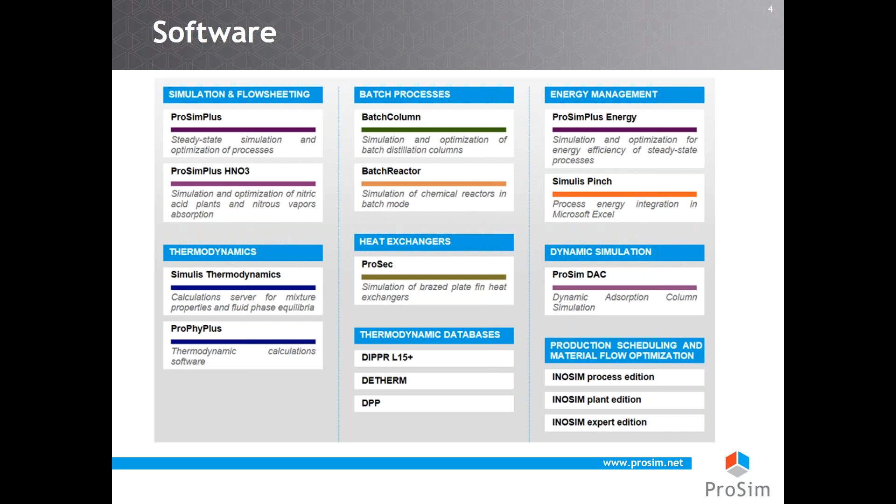Our headquarters is based in the south of France in Toulouse. We also have a subsidiary in Philadelphia in the US. We have a network of distributors located in various countries, and we have over 1,000 customers in 73 countries who are operating companies as well as engineering and construction companies or equipment manufacturers in all process industries worldwide.

Thanks to long-term partnerships with major research centers, ProSim continuously develops innovative software and has become a major player on the international market. I will let Olivier complete the information about our network of partners. So hi everybody. ProSim is a spin-off of the ENSIACET Chemical Engineering School, and so we are very close to the research lab of this school, which is the Laboratoire de Génie Chimique of Toulouse.

We also have collaboration with the other main research center around chemical engineering in Nancy, LRGP, and we work with the team of Professor Jaubert, who developed a thermodynamic model which is predictive, an equation of state based on PR, which is called PPR78.

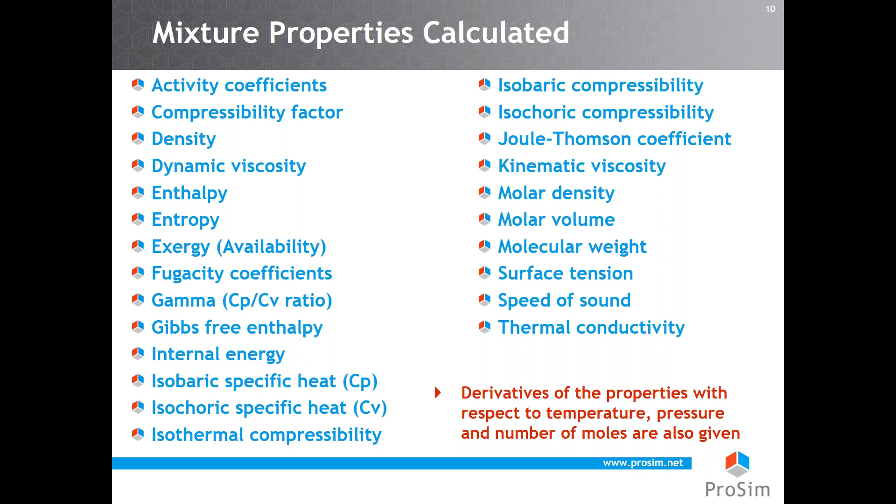And what is very important to note is that you can compute the property, but also their derivatives with respect to temperature, pressure, and also the number of moles. That means that Simulis Thermodynamics can be used to build your model and then compute the Jacobian matrices.

Then also included inside Simulis Thermodynamics are the flashes, which are used to determine the phase of the mixtures, considering temperature, pressure, and composition. You have vapor-liquid equilibrium calculation. To compute a flash, you have to know the composition of the mixtures, but also two different variables between temperature, pressure, vapor ratio, molar volume, enthalpy, entropy, or internal energy.

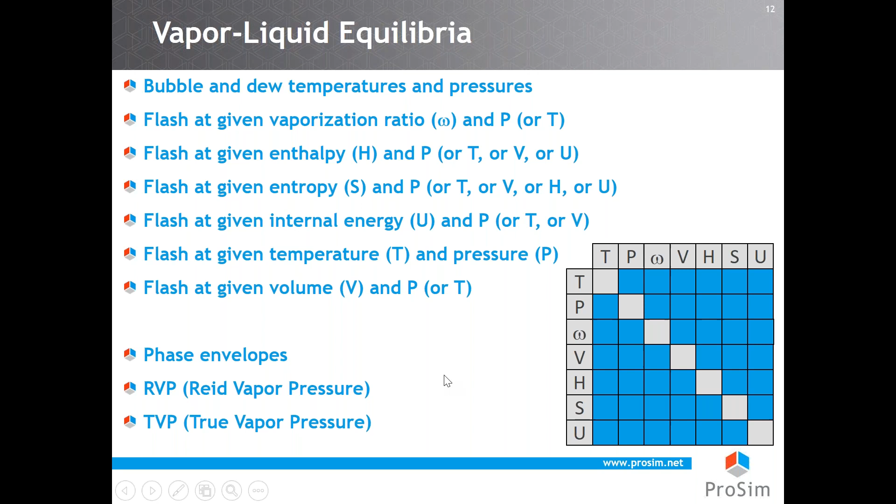And so what you can see on this slide, the matrices, you can compute any kind of flash mixing two of these properties. Using Simulis Thermodynamics, you can also compute phase envelopes and also properties like Reid vapor pressure and true vapor pressure. You can also compute liquid phase demixing, and also you can have flashes with a vapor phase and two liquid phases. And also you can have calculation with a vapor phase, a liquid phase, and a solid phase.

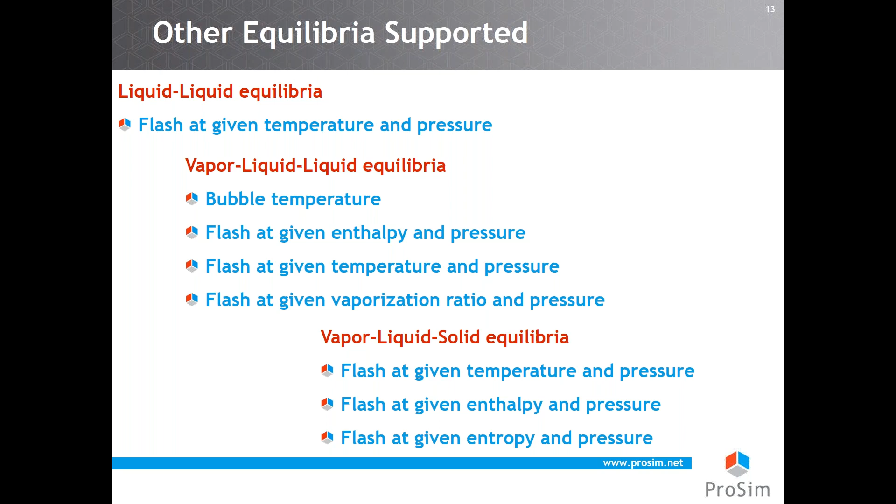Then included also inside Simulis Thermodynamics, you have databases for pure components. Simulis Thermodynamics includes the DIPPR database, and you can include as many user databases as you want. There are also databases for binary interaction parameters for models which require this kind of information. And Simulis Thermodynamics can be linked with the data preparation package, which is a software provided by the DECHEMA.

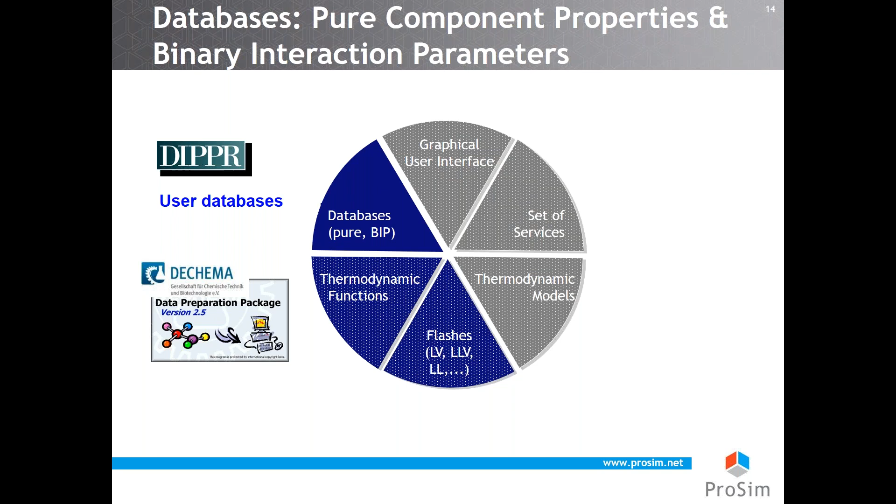Regarding databases, we supply the most recent public release of DIPPR, but also the previous releases that can be used in order to make comparison with components from the previous release. And also you can be sure that you can get the same results with calculations you have done some years ago. For pure component properties, you can of course access all the properties which are included for all components. You can modify them if you want. You can also plot the temperature dependent properties.

Included inside the software, you have a tool to regress your own experimental data or experimental data from the literature. We also provide methods for the prediction of intrinsic but also temperature dependent properties from the molecular description of the molecules using the SMILES, which is a very common way to describe the molecular structure of the molecule. The SMILES can also be used in order to generate all the group contribution predictive model decompositions, such as, for example, PPR78 or UNIFAC methods. And Simulis Thermodynamics includes also tools to calculate petroleum fraction properties.

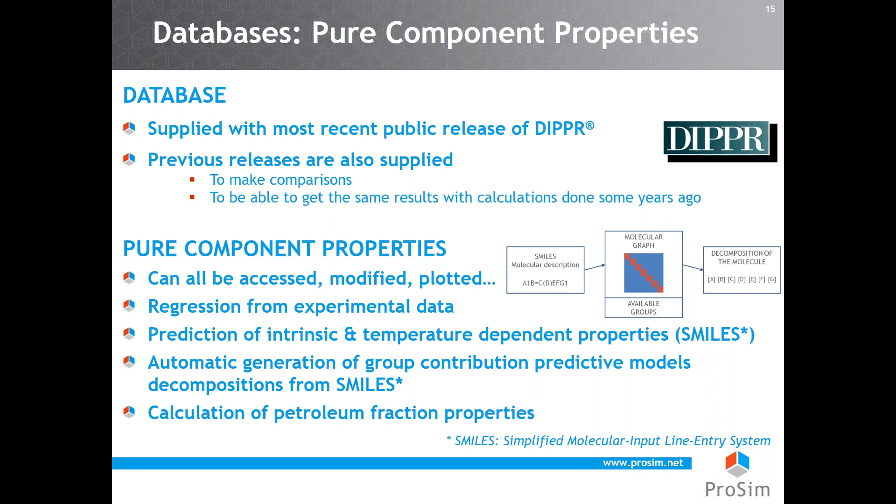Regarding the binary interaction parameters, for models which require this kind of information, like for example, activity coefficient models like NRTL, or equations of state like Peng-Robinson or Redlich-Kwong-Soave, we provide libraries for this information. But you can also fit this information from experimental data using the data preparation package from the DECHEMA or using Simulis Thermodynamics inside Excel.

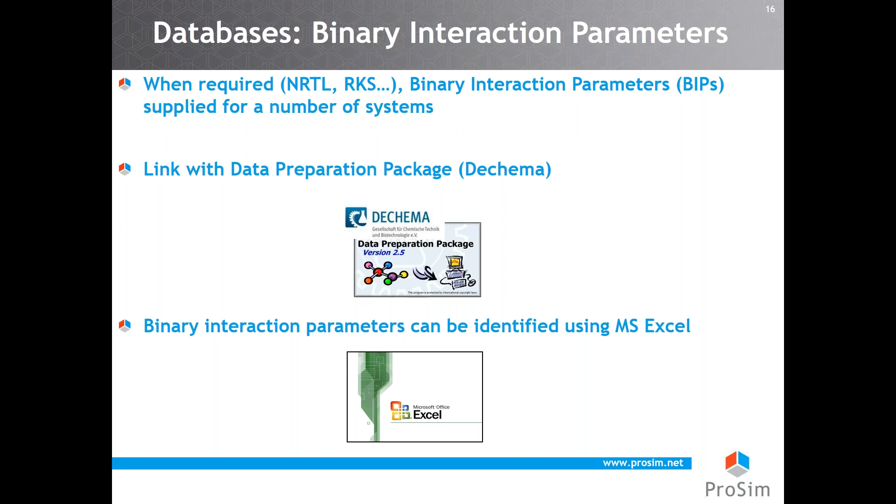Of course, the most important part of a thermodynamic server is the library of thermodynamic models. Roughly, there are two different approaches to describe thermodynamic phase equilibria and thermodynamic properties. One is called the homogeneous approach. That means that you will use just one equation to represent all the phases which are present in the mixture.

This equation of state presents several advantages. You need few data. That means, for example, for cubic equations of state, you will need only critical temperature and pressure, acentric factors, and binary interaction parameters. And if you want to do some enthalpy calculation, you need also the ideal gas heat capacity. And there is no limitation in terms of temperature and pressure.

But there are some drawbacks also using this kind of approach. The main drawback is that when we use van der Waals mixing rules, this kind of equation of state is very often limited to low polar components. So the other way to represent your thermodynamic system is the heterogeneous approach. That means that you still use an equation of state to represent the vapor phase, but in order to take into account the non-ideality of the liquid phase, you will use an activity coefficient model.

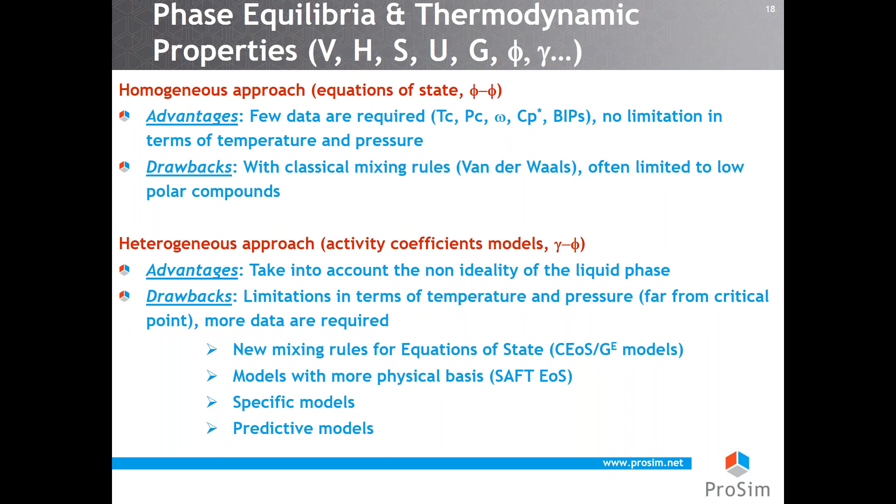So that means that we try to develop and implement every year new models, and these developments are linked with several ways, which are: first, we try to have new mixing rules for equation of state. We will have some explanation after that. We also try to have models with more physical basis, like SAFT equation of state. We also implement some specific models for specific systems. And given that there are a huge number of molecules in nature, we also try to implement more and more predictive models.

If we have a short explanation about the equation of state approach, here you have a phase diagram for two-component mixtures with methane and benzene. The pink curve represents the vapor pressure of the methane. The round circle here is the critical point, and the yellow curve is the vapor pressure of the benzene with its critical point here. Above the curve, you are liquid, and if you are under the curve, you are vapor.

From the knowledge of the pure component properties, if you want to know in the pressure-temperature plane what phases are present for your system, you need to use an equation of state to compute what we call the phase envelope. That means in blue the bubble curve, and in red the dew curve, and both curves are crossing at the critical point of the mixture. Above the blue curve, you are in the liquid phase. Under the red curve, you are in the vapor phase. And inside these curves, you have both liquid and vapor.

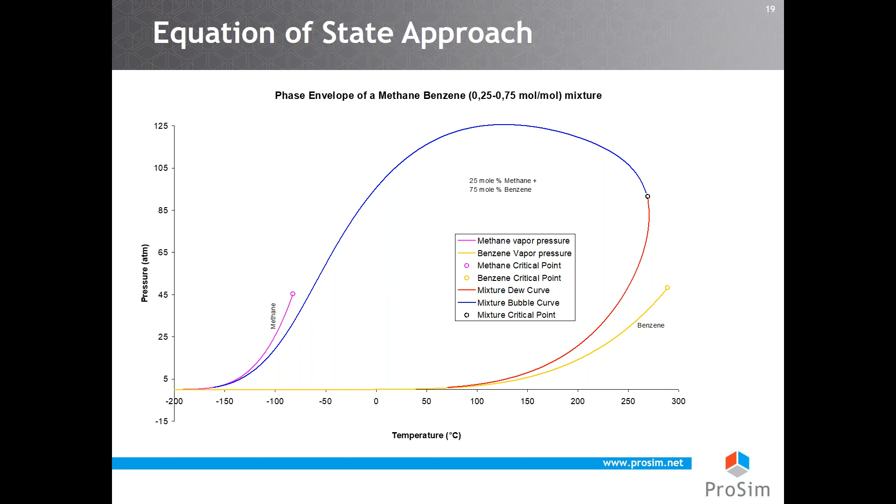This kind of phase envelope is very useful, for example, when you do some gas transportation. In this slide, you can see mixtures with mainly methane. That means 99.99 mole% of methane, with just a small amount of impurities, which are nonane, ethylbenzene, and dimethylcyclohexane, only 0.01 mole%. And you can see that the shapes of the dew curves are very different.

If we are at 40 bars, for example, if the impurity is n-nonane, that means that if the temperature is less than -8 degrees, there is a liquid phase which can appear. If the impurity is ethylbenzene, in that case, the dew curve is around -20 degrees. And if dimethylcyclohexane is the impurity, in that case, you can go to -40 degrees with no liquid phase.

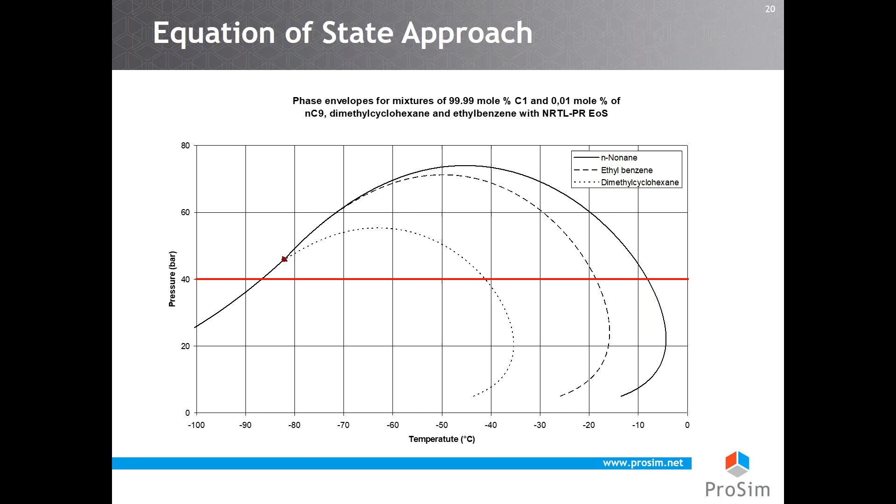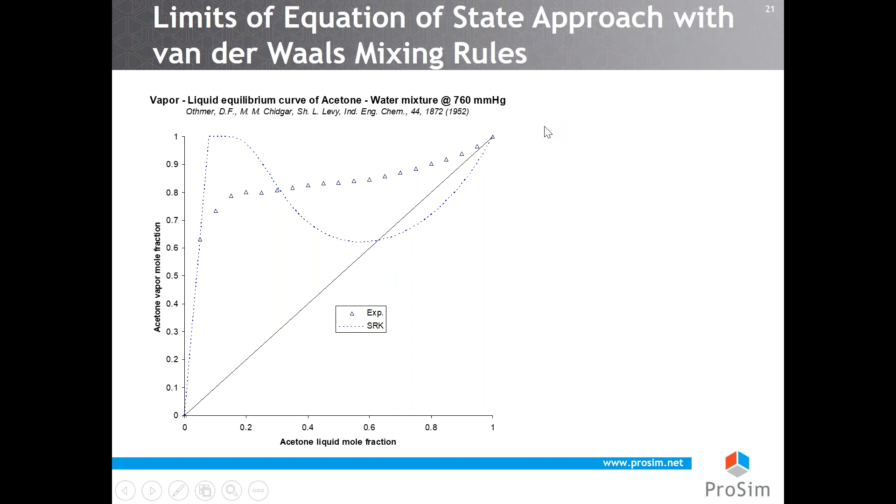The problem is that when we use an equation of state, like for example SRK, to try to represent mixtures with polar components, like the acetone-water mixture, you can see on that graph experimental data, which are the triangles, and we plot the vapor fraction with respect to the liquid mole fraction. And if we use SRK, you can see that the behavior is not the one in the real case.

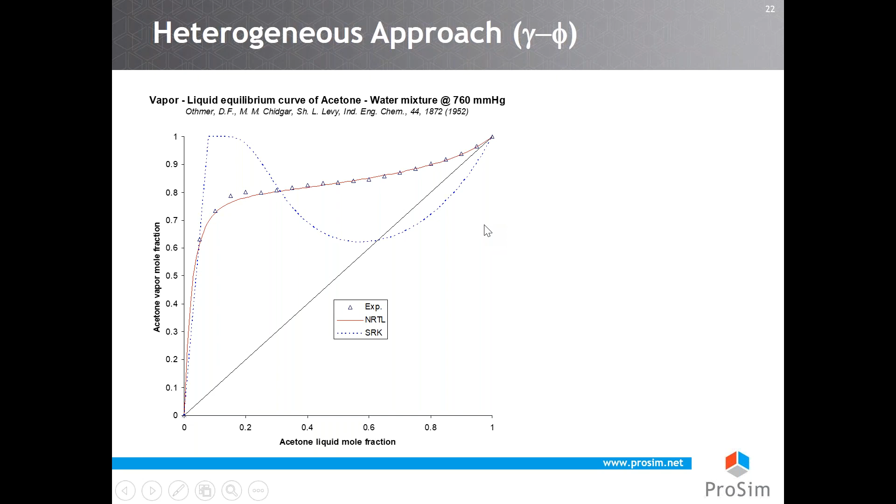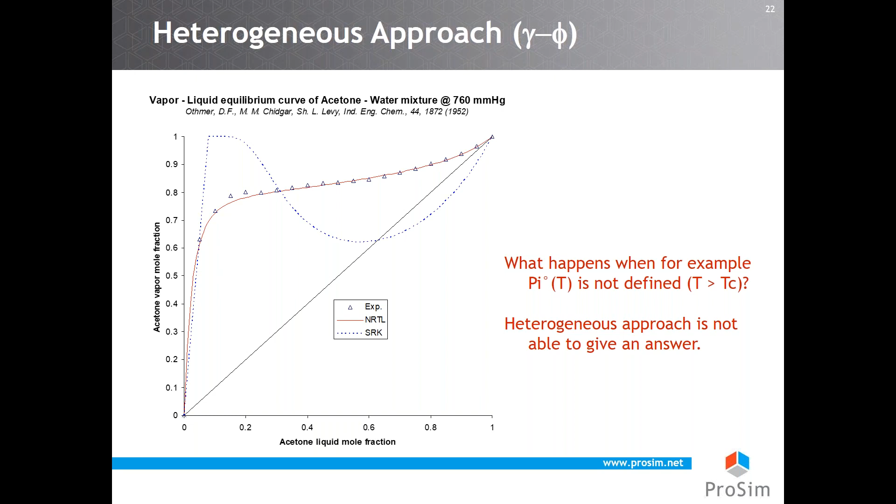So in that case, what we have to do is to use an activity coefficient model to represent the non-ideality in the liquid phase. And in that case, you fit binary interaction parameters and you obtain values which are close to the experimental points. The problem with that approach is what can we do if, for example, the temperature is above the critical temperature of one of the components, because the vapor pressure is not defined. So that means that the heterogeneous approach in that case is not an answer.

So researchers developed in the 90s of the previous century new mixing rules. They started with cubic equations of state based on the Redlich-Kwong or Peng-Robinson equation of state, for example. And they developed mixing rules. The first one was developed by Vidal from the French Petroleum Institute. And there were modifications by Michelsen, by Huron, and so on.

And inside the attractive term, the Gibbs excess model is included, and this model can be one of the previously described models, like Wilson, NRTL, UNIQUAC, or a predictive model like UNIFAC. That means that this is an equation of state approach which is able to manage polar components also.

But what is interesting is the next slide: if you use this model with no more information, you are able to predict the vapor-liquid behavior at elevated temperature and pressure. And if you have a look at the red curve, in that case, you are above the critical temperature of the acetone. So that means that this kind of model is predictive at elevated temperature and pressure.

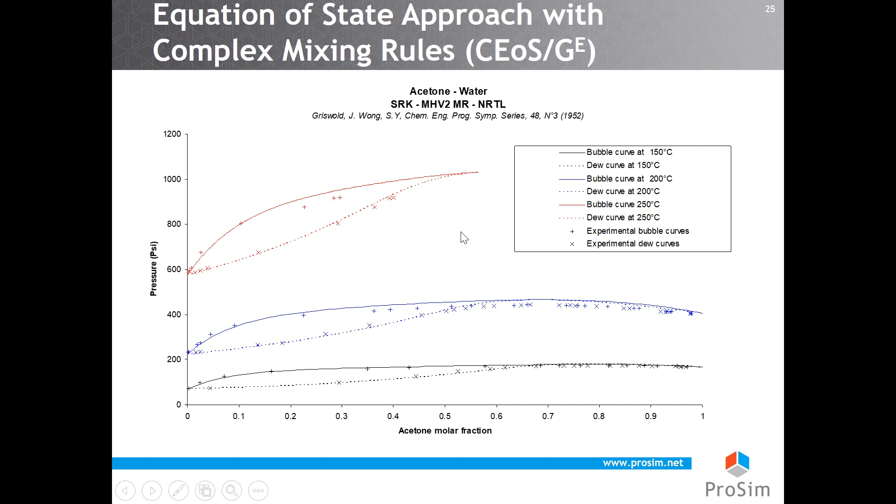Regarding the library of thermodynamic models included inside Simulis Thermodynamics, you will find classical equations of state like Redlich-Kwong-Soave, Peng-Robinson, and so on. You can select several kinds of alpha function. You also have other equations of state based on corresponding states, like LKP, or based on hard sphere models like Nakamura, and also SAFT equations of state, and so on.

Also included, you have a lot of activity coefficient models, including all the models developed by the Unifac consortium, which are predictive models, but also other predictive models, like the Unifac model developed by NIST.

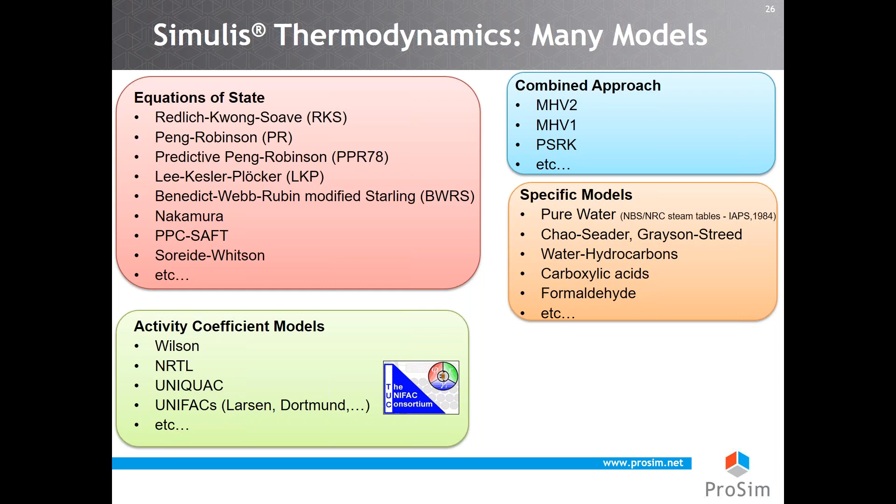Regarding complex mixing rules, as I mentioned before, you have several mixing rules. You can link any cubic equation of state with any Gibbs excess model. We also include specific models, mainly for associating components, like pure water, for example, but also for carboxylic acids for dimerization, or for systems with water and formaldehyde, for example.

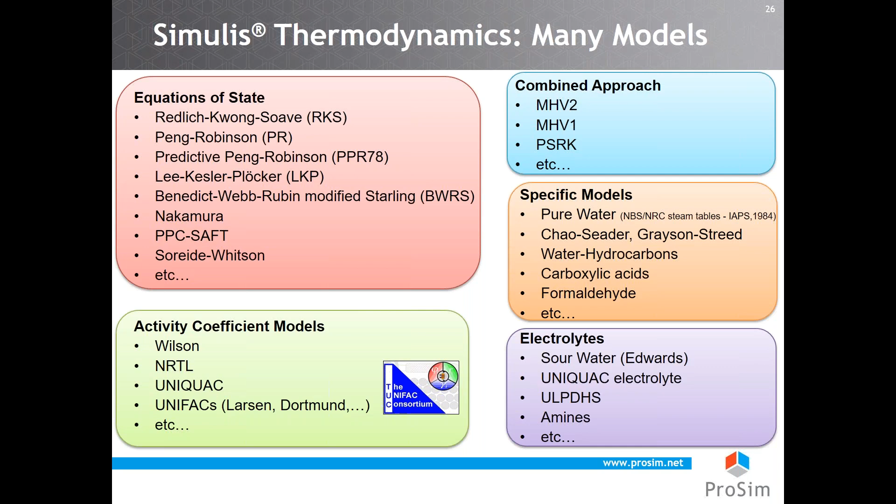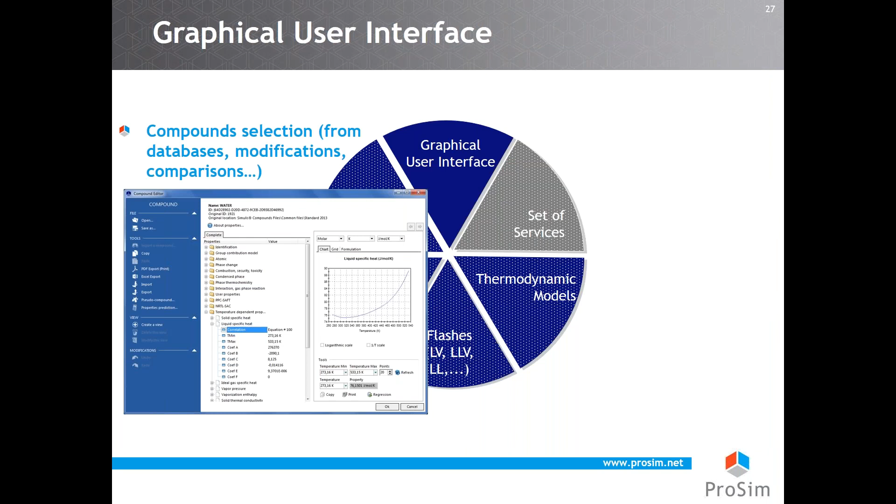And we also have a library of electrolyte models. Also included inside the software component, you will find a graphical user interface. This graphical user interface can be used to select your components from the database. You can modify these properties, compare them, and so on, but also configure your property model. And what is important to note is that there is no black box inside Simulis Thermodynamics. That means that anything you want to change, you can change it.

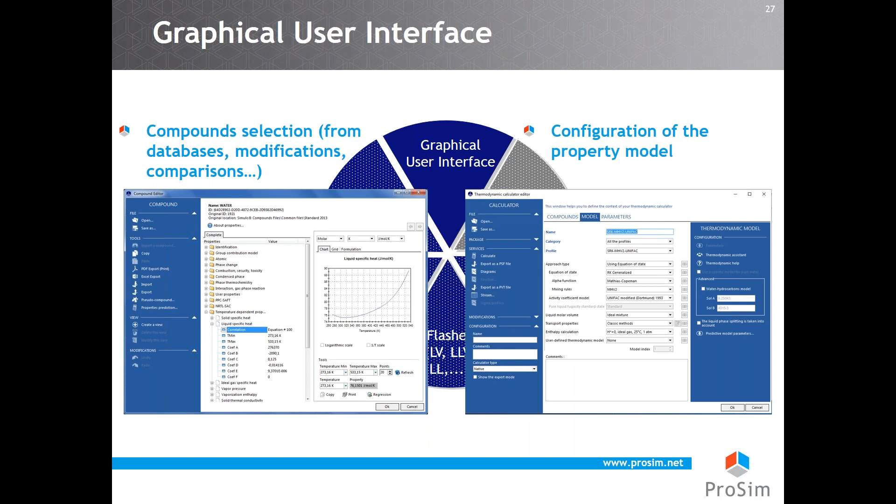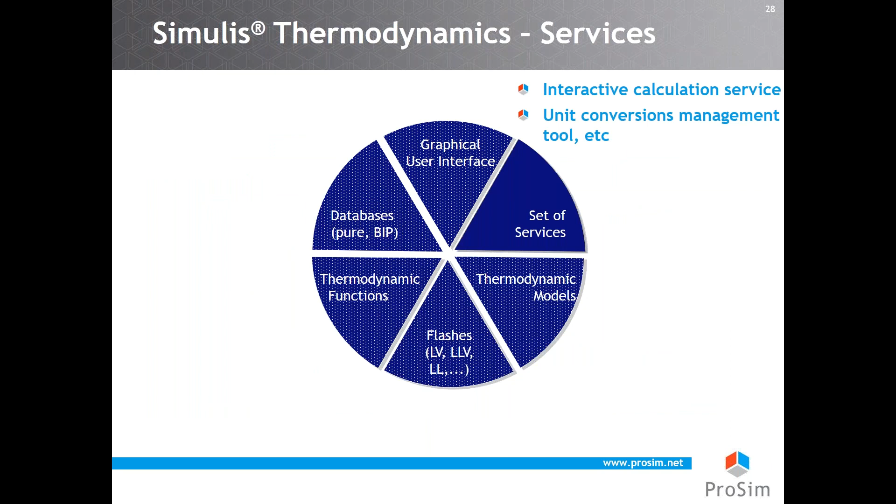The last part is what we call the services, for example to manage unit conversions or to have interactive calculation. For example, directly from Simulis, you will be able to compute fluid phase equilibria, or also residue curves in order to manage your distillation.

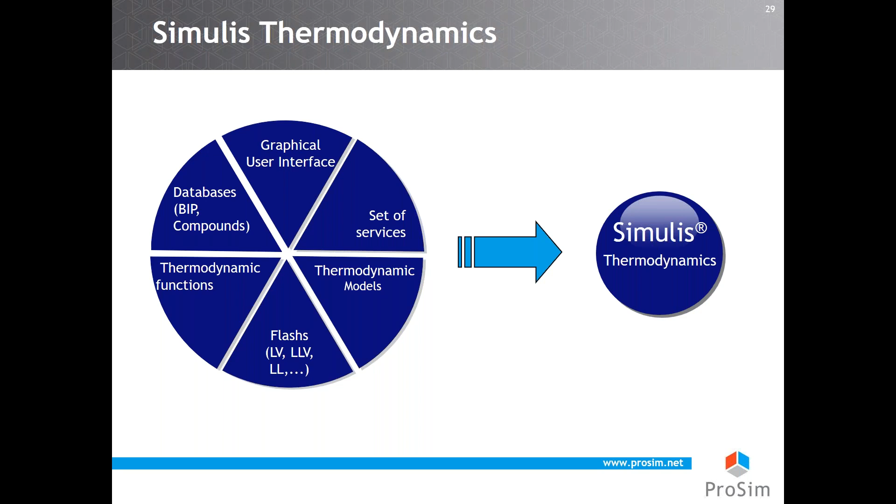And all these things, as I said before, are included inside the components. That means that any software which embeds Simulis Thermodynamics will be able to access any of these functionalities.

Simulis Thermodynamics is used as the heart of all our software. That means ProSim Plus, for example, for steady state calculation, or Batch Column for calculation of batch distillation.

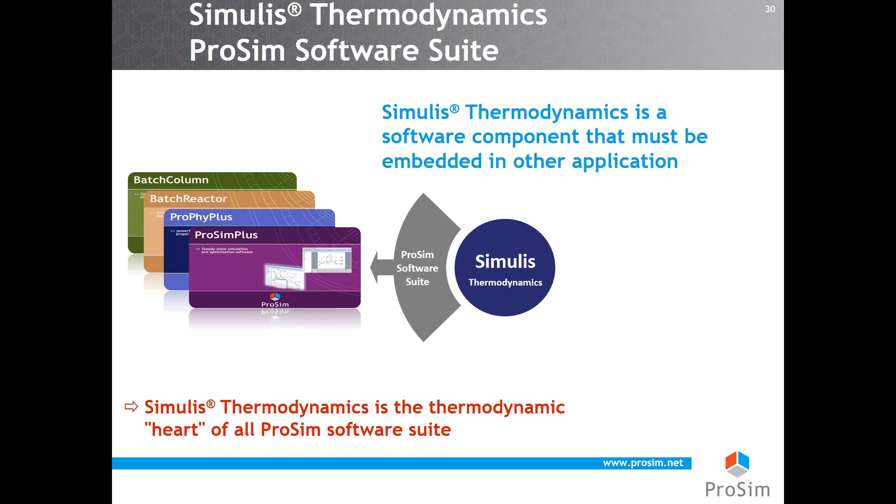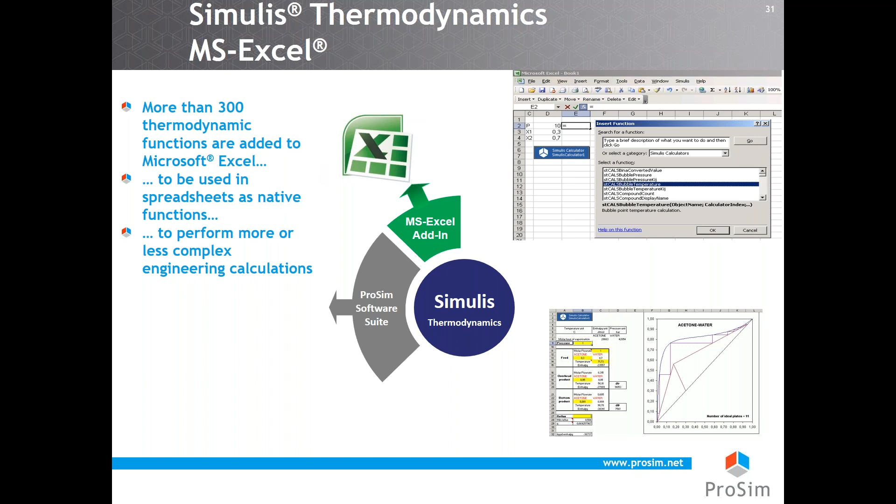Simulis Thermodynamics is also available as an add-in in Microsoft Excel. We will have a look at that in the next part of the presentation. That means that you will find several hundred new functions which are related to thermodynamics. You also have a toolbox in MATLAB, so that means you will access the same thermodynamics in Excel and in MATLAB.

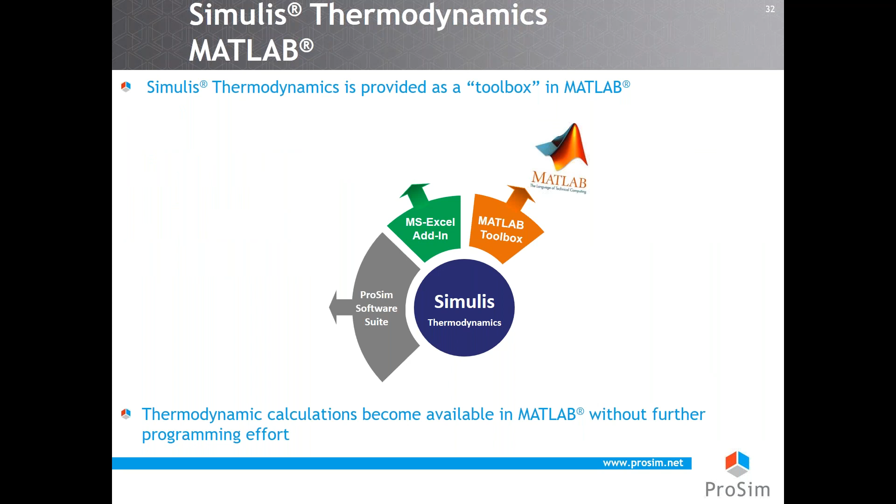You can also export your results to Microsoft Excel, or in some formats which are used by software that requires tabulated data.

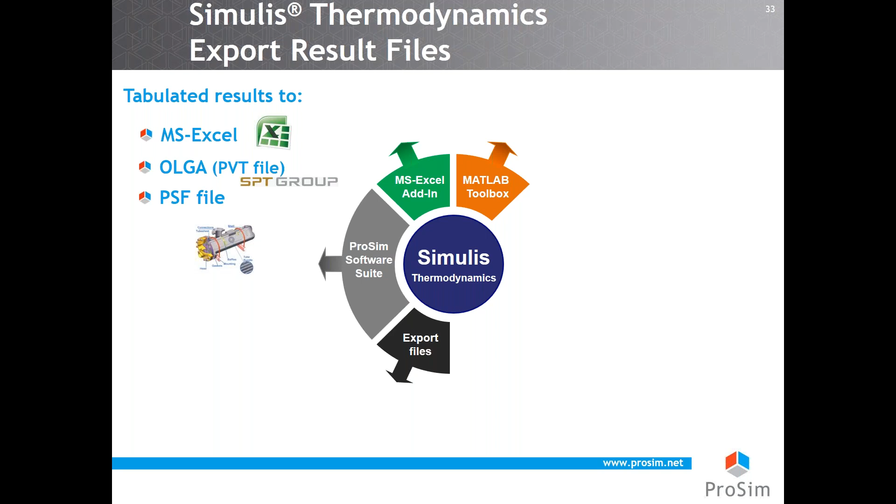We also provide with Simulis Thermodynamics an application programming interface. That means that you can use Simulis Thermodynamics inside any programming language like C++, C#, Fortran, and so on. And so some of our customers use Simulis in their own software as a thermodynamic server.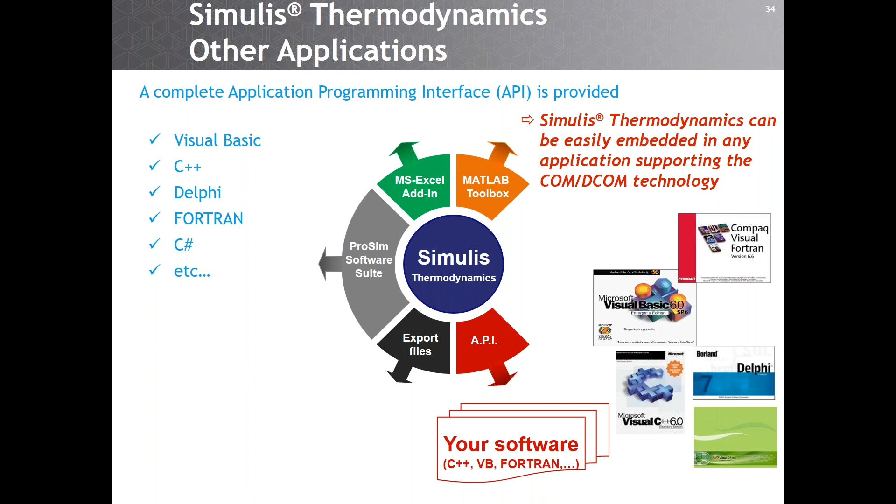We spoke very shortly about Cape Open. Cape Open is a standard which was developed in the middle of the 90s in order to have interoperability between software providers. It was a European project at the beginning, then it became a worldwide project, and today it is used in order to have one software which is able to communicate with another software.

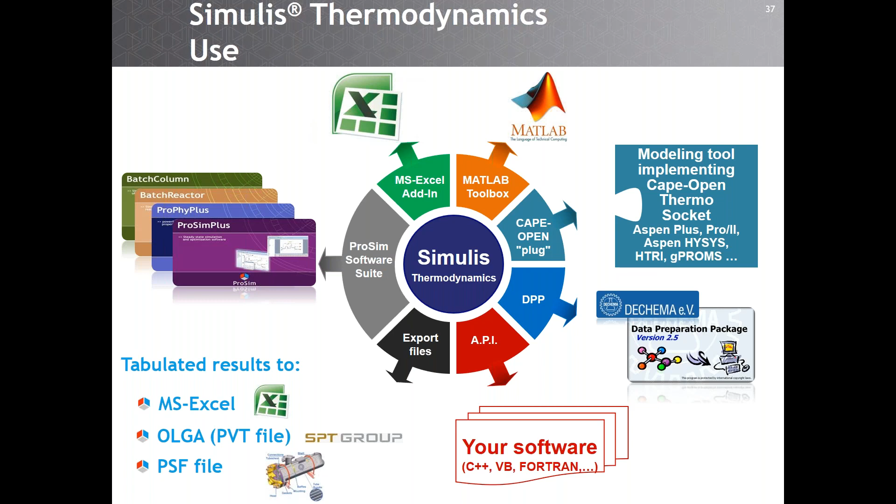So when you see this slide, you can see that using Simulis Thermodynamics, you will be ensured that you will have the same way to describe your thermodynamics. That means that you just have to learn how to use Simulis Thermodynamics, and you will have always the same results, given that you use the same software component.

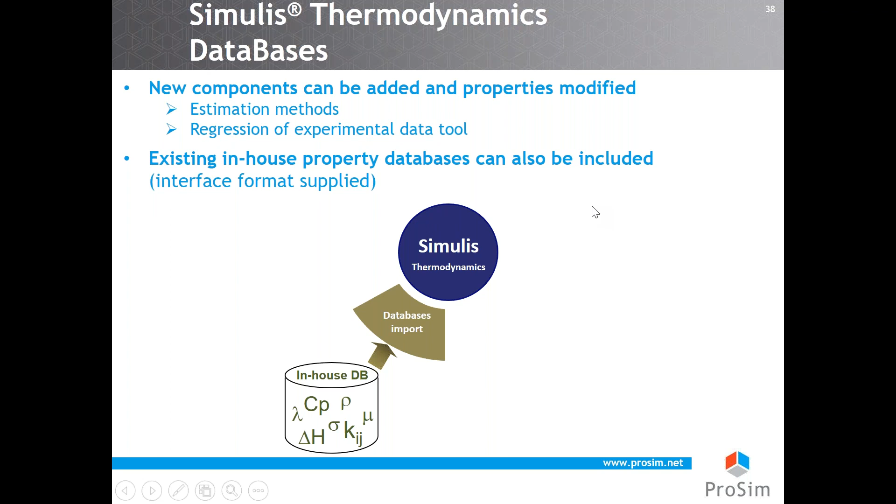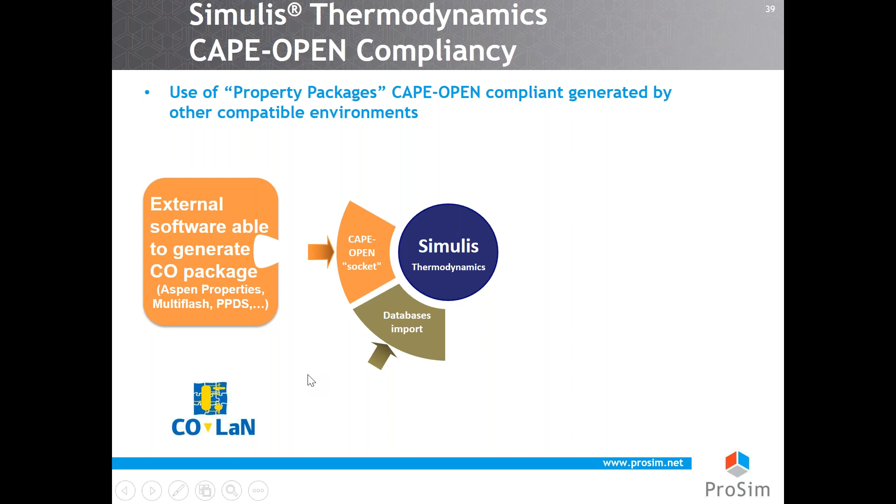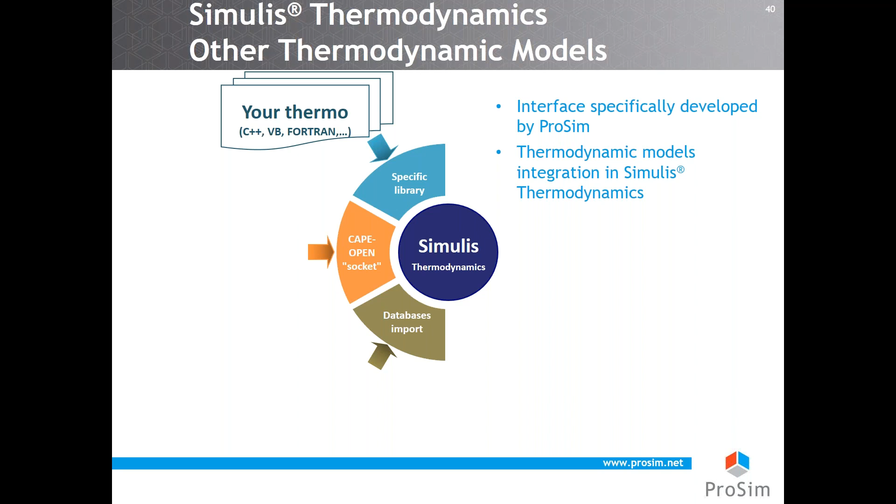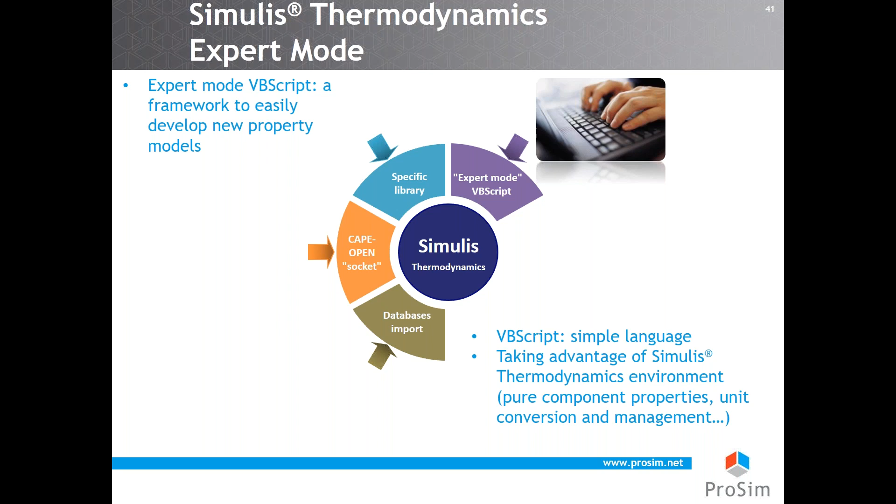You can also implement your own model using a very simple language, VB script. In that case, you can access all the thermodynamic properties - pure component properties, but also unit conversion and so on. This kind of feature can be very useful, for example, if you want to add new mixing rules for viscosity or thermal conductivity. With just a few lines of code, you'll be able to have the exact behavior of your mixture.

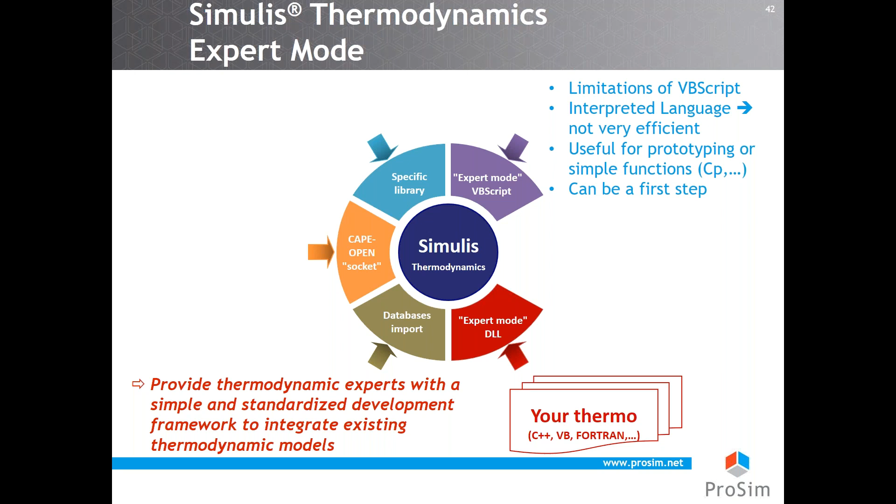The last part is that you also have inside Simulis Thermodynamics a socket which is here to use directly the RefProp library from the NIST. So here you have different ways to enrich Simulis Thermodynamics with your own model or models coming from other providers.

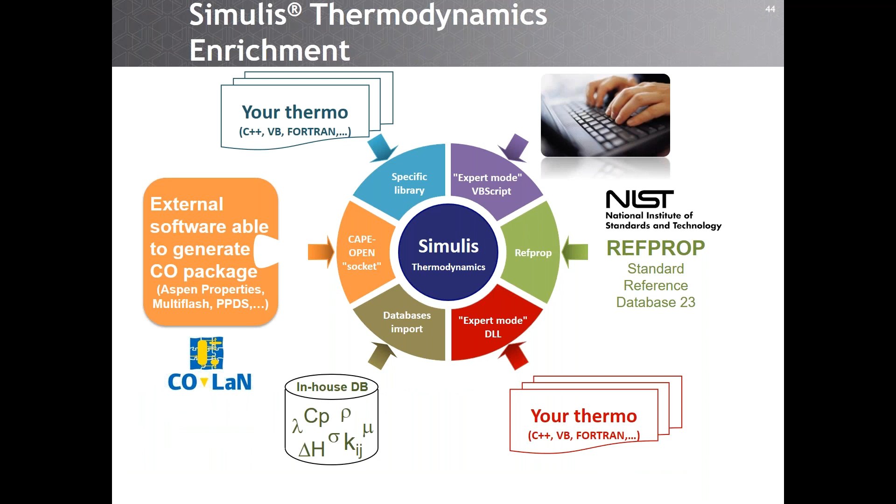So I will now go inside Microsoft Excel. When you have Simulis Thermodynamics, in the add-in tab, you have this menu, and you can insert a Simulis system, for example. In fact, Simulis is like the Russian doll.

At the heart, you have the unit management. Then above that, you have the compounds, Simulis compounds, which is related to the properties of the components. Then you have Simulis compounds, which correspond to the list of components. Then the Simulis calculator, which corresponds to a list of compounds plus the model used to describe these mixtures. And then Simulis calculators, which correspond to a list of calculators.

So we will use today a Simulis calculator. You have to select the place in the Excel spreadsheet where you want to put the Simulis object. You can add as many Simulis Thermodynamics objects as you want in a Microsoft spreadsheet.

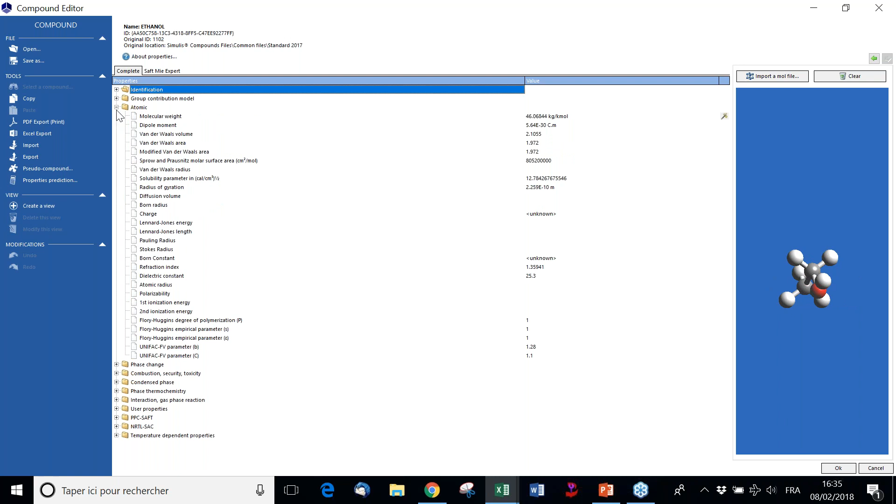You also have atomic properties. You have phase change properties. And what you can note is that thanks to the Simulis Units software component, for example, for the critical pressure, here you have all the corresponding values for different units.

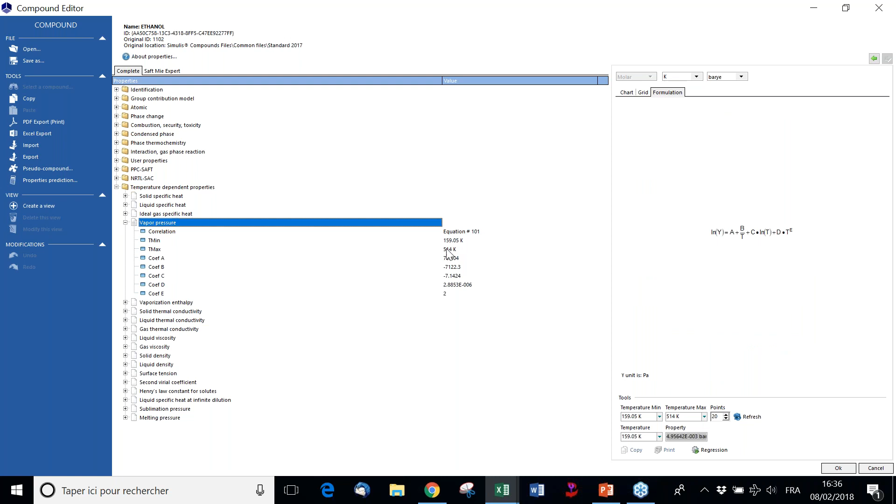Regarding temperature-dependent properties, here, for example, if we look at the vapor pressure, here you have the equation which is used. On the right part of the tab, you can see the formulation of the equation. And here you have the validity range for the correlations and the coefficients A, B, C, D, and E.

Here you have the values which are tabulated from the minimum temperature to the maximum temperature, and here you have the chart. Of course, you can change the unit if you want. You can also change the scale, for example, here. And you can also compute the value at different temperatures if you want.

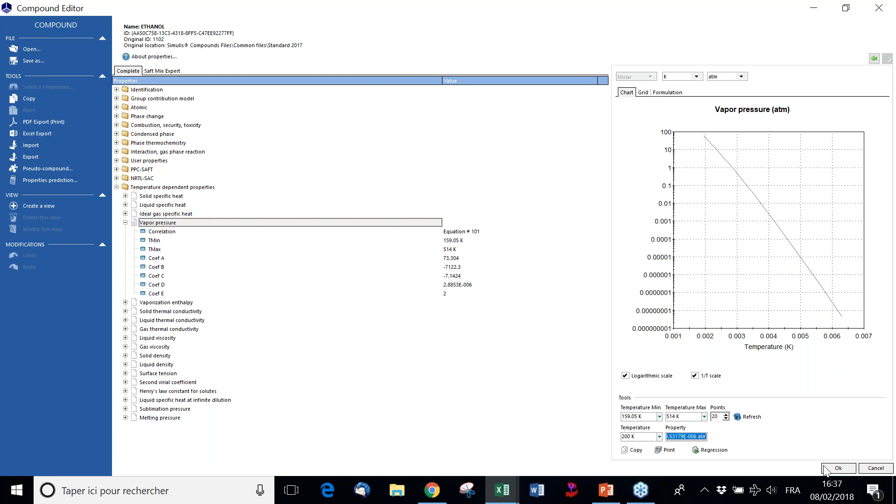Then I spoke before about services. Here, for example, you have services about components. You can do some comparison on the properties - for example, properties depending on temperature. We will select the vapor pressure, and we will compare the properties for all the components, which can be useful if you want to see which are the more volatile components, or for example, if there are some Bancroft points, to see if there could be some azeotrope in the system and so on.

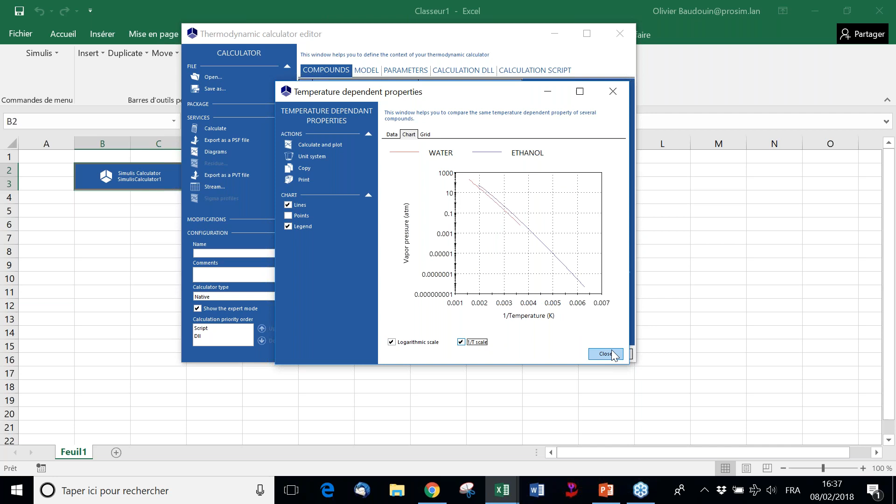You can also compare components if you want. That means, for example, if you clone components and have some properties changed, you can see where the differences are. If you've made a change, you can compare with the original. Simulis Thermodynamics will tell you if there are changes between the database and the calculator. There's also the editor array, useful when you want to compare components and see the values for one versus the other.

Regarding the databases, it's very easy to publish a new database. You have this button, then you enter the name here, click OK, and you have a new database. You can also save the compound package as a compound file, and then open this compound file from any other Simulis object.

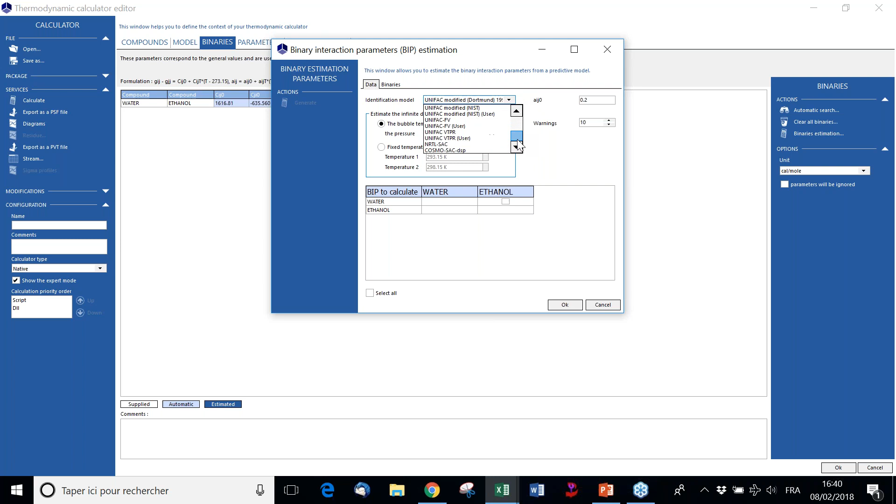Using NRTL, we need some binary interaction parameters, so we have a new tab here for binaries. When you go to this binary tab, you can search directly from our databases - an automatic search that fills in data stored in our database. If you want, you can also estimate these binary interaction parameters using one of the predictive methods we have, like UNIFAC, but also methods like COSMO.

So once you've selected the components, described the model, and set the binaries, you can use the services offered by the calculator, like the calculation service. Here you have several calculations available for physical properties, like transport properties and so on, or for equilibria calculation. What we're doing is computing the bubble and dew temperatures at atmospheric pressure for the entire range of composition from pure water to pure ethanol.

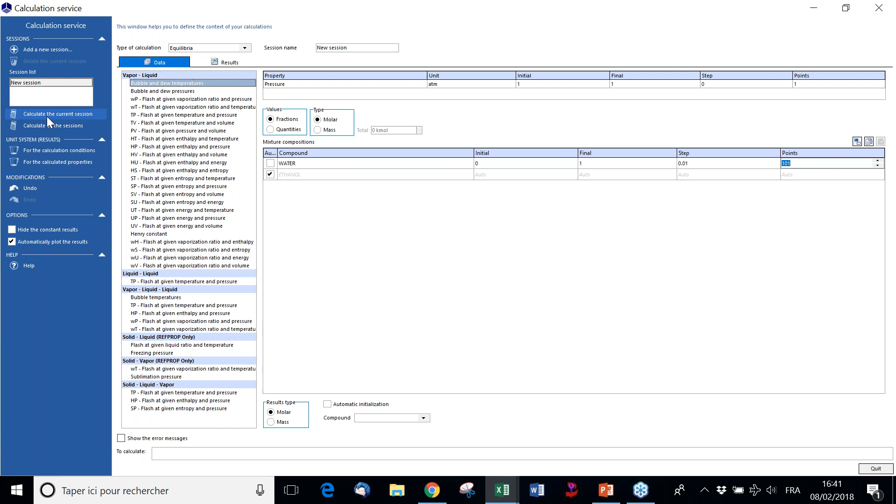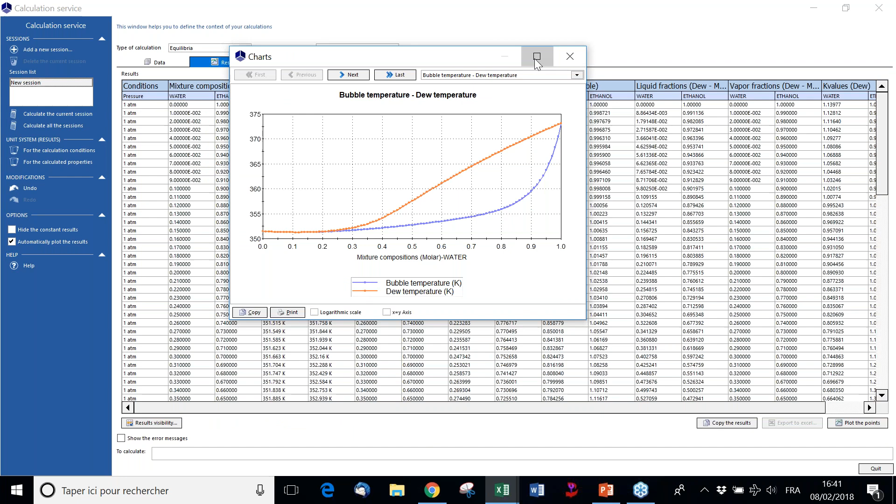And then we calculate. Here we have the results - the bubble curve and the dew curve. You can also have the equilibrium curves here, meaning the vapor fraction with respect to the liquid molar fraction. You can add this axis and zoom in to see where the azeotrope is.

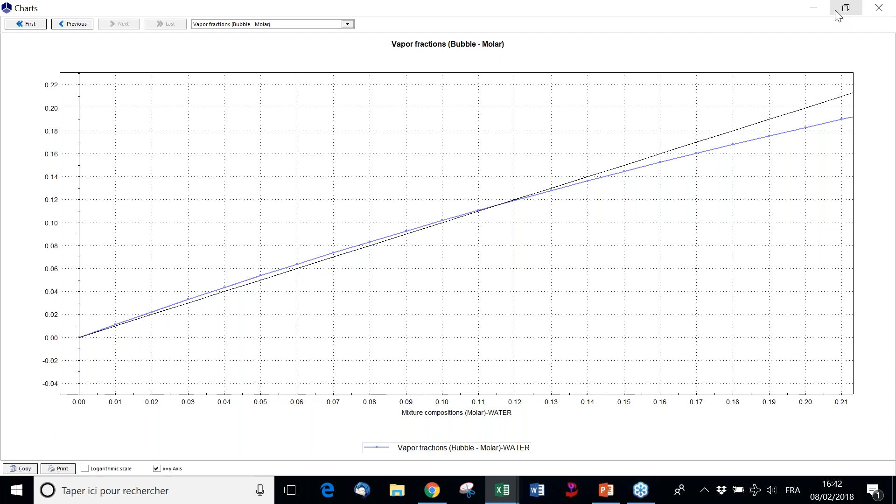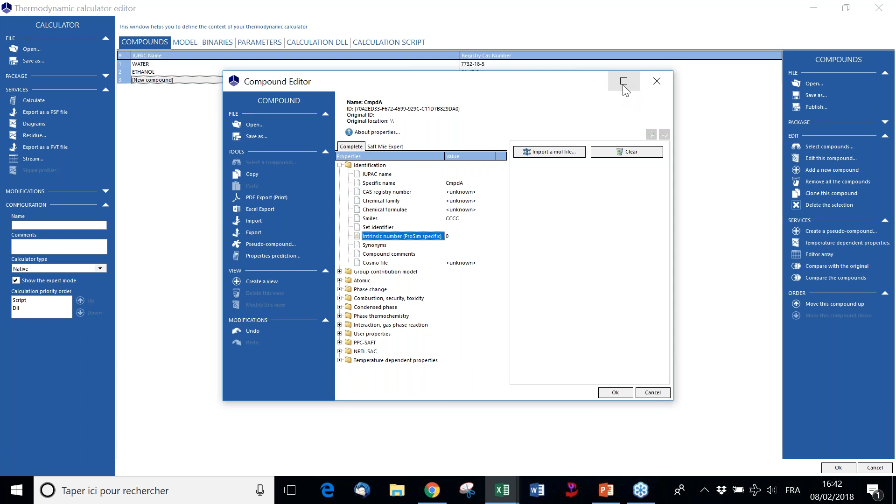If you want to add a new component, you use 'add a new compound' here. When you click on this component, it's empty - nothing is stored - so you can provide a name, for example. Then if you provide a SMILES string here, you'll see a symbol appear, and if you click on that, it will predict the property. You can predict all the properties if you want using this button, and select several types of prediction methods.

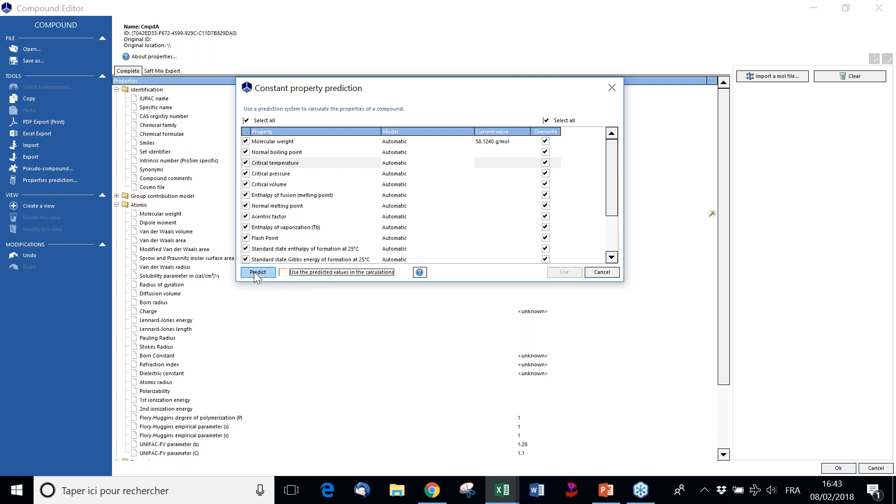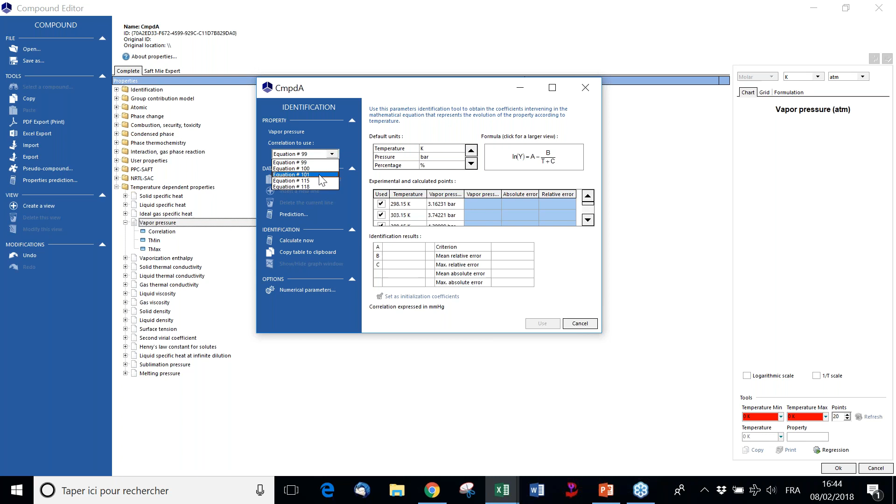And it will fill all the fields here. Regarding temperature-dependent properties, like vapor pressure for example, you can go to the regression button, and then you have two choices: you can copy and paste experimental data, or predict your value using a method. Here you have the predicted properties - select the equation you want to use, for example the DIPPR equation, then calculate and do the regression. Here you have the results in graphical form, and also all the results from the fitting, which will show you all the fitted parameters.

Now I'll show you how you can access these properties inside Microsoft Excel. Since you can have several calculators inside the same spreadsheet, you have to rename your calculator first. In this case, I'll call it water-ethanol-NRTL. I'll put the name here, and then I'll access the properties.

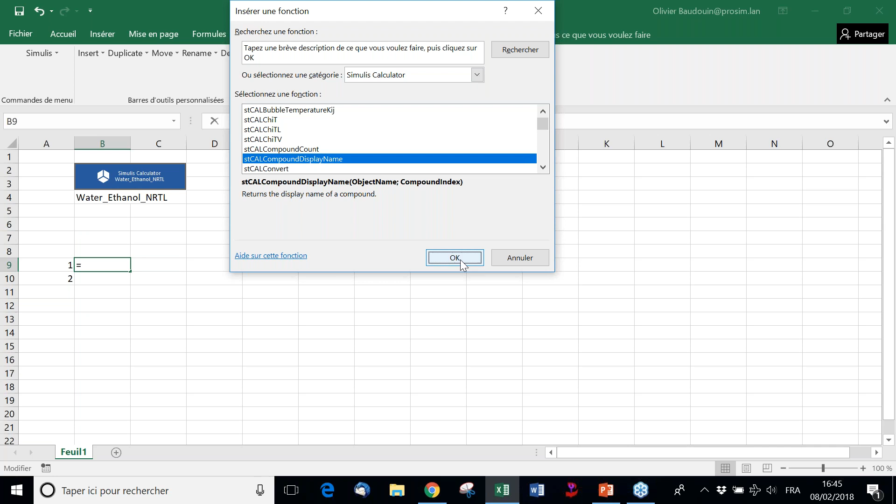If you click on this button, you'll see new categories of functions, for example Simulis calculator, and here you have all the functions available. For example, this function returns the display name of a component. The first argument is the object name, meaning which calculator you want to use - this one - and then the component index, this one. What's also important is to have the correct units used in your calculation spreadsheet.

And here, I will go to select a function which is providing the units which are used inside Simulis Thermodynamics for the input system. That means, if I provide here the one value, this one, and the quantity. The quantity is the English name of the value, and if you want to find this quantity, you have here some help on the identifiers.

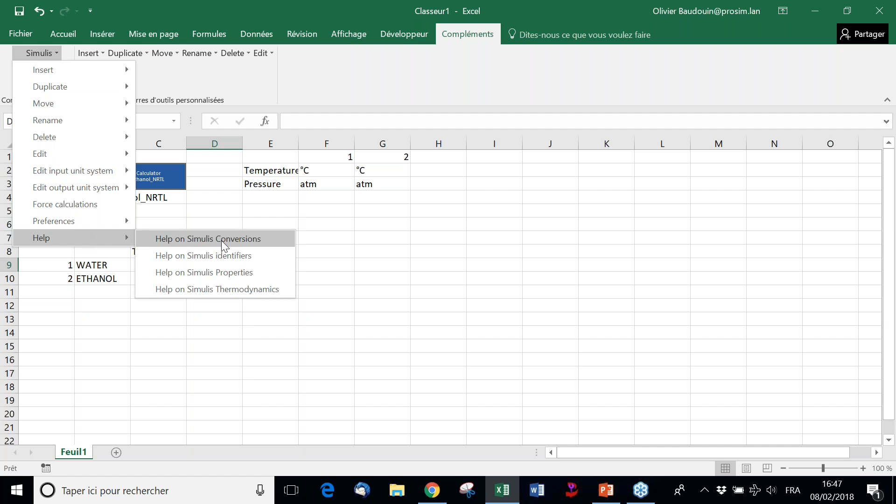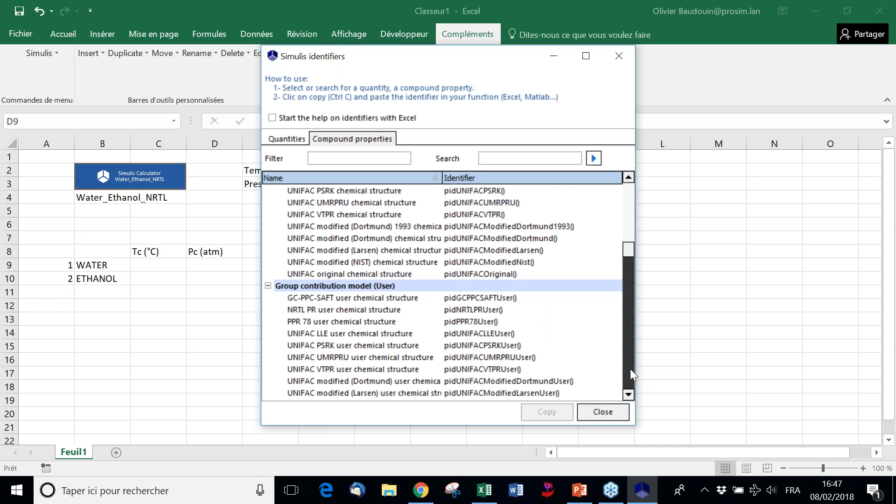You can also have access to all the properties which are stored for the components. For example, we can recover the critical temperature and the critical pressure. And we need, in that case, to know the identifier of these properties. These properties are phase change properties. So here you have the identifier for the critical temperature. I copy. And here for the critical pressure.

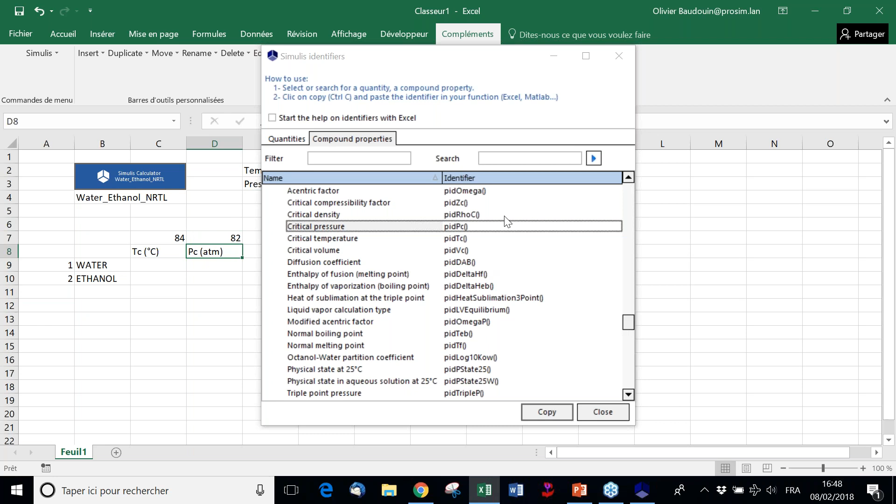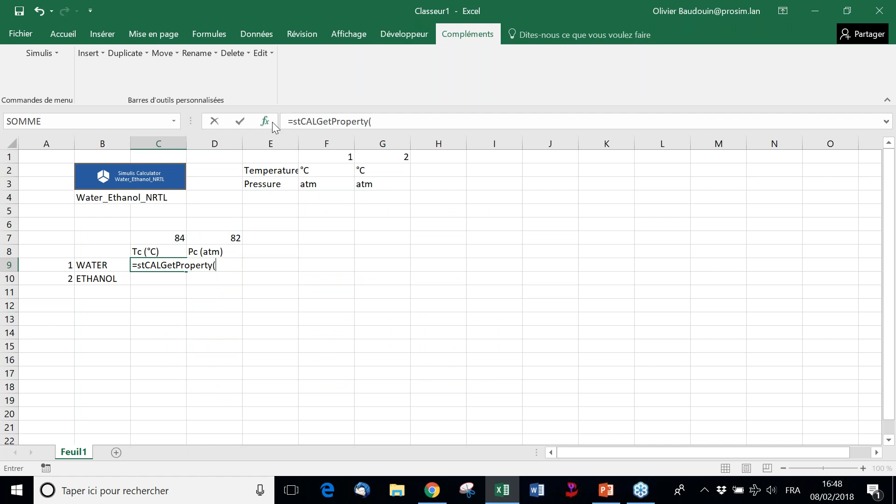And you have a function to have access to the property. Still the object name, then the compound index, then the property ID.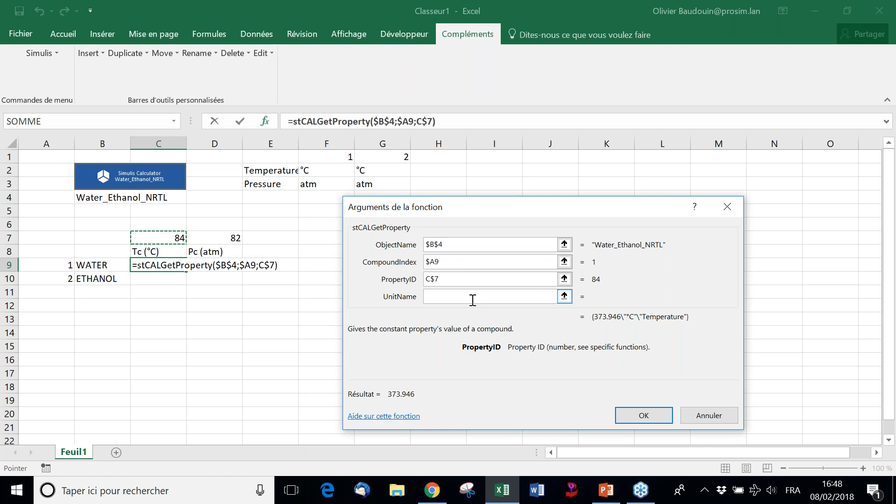Now we'll do the same calculation as the one we did previously in the Calculator service. We'll do the bubble and the dew curve calculation. So first I will put the composition of the mixtures. I will do the calculation from 0 to 1 with a step of 0.01.

Here I will compute the bubble temperature. I will put here the pressure for the calculation, and also whether I want molar or mass for the composition in the input, and molar or mass for the results.

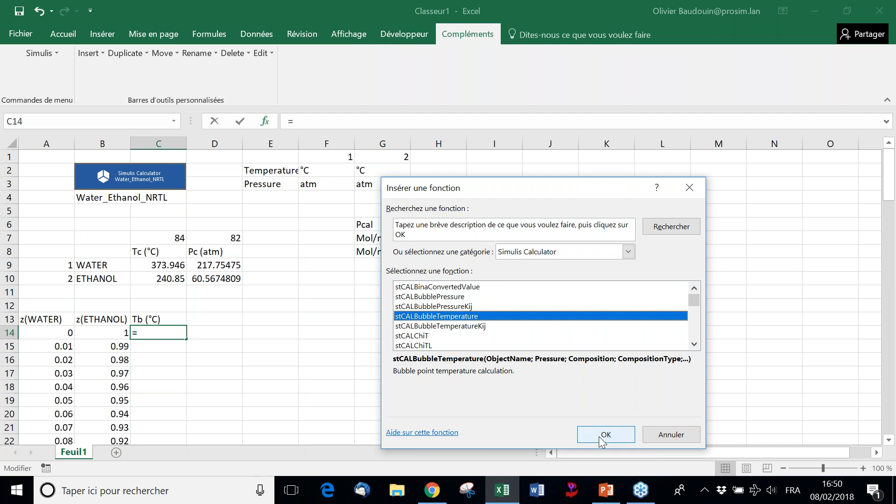So here you have the stCAL bubble temperature to compute the bubble point temperature calculation. Still, I will provide the object name, then the calculation pressure here, then the composition type, 0 for molar, 1 for mass, and here the result type, same, 0 for molar, 1 for mass. And if you want, you can also provide some initialization value.

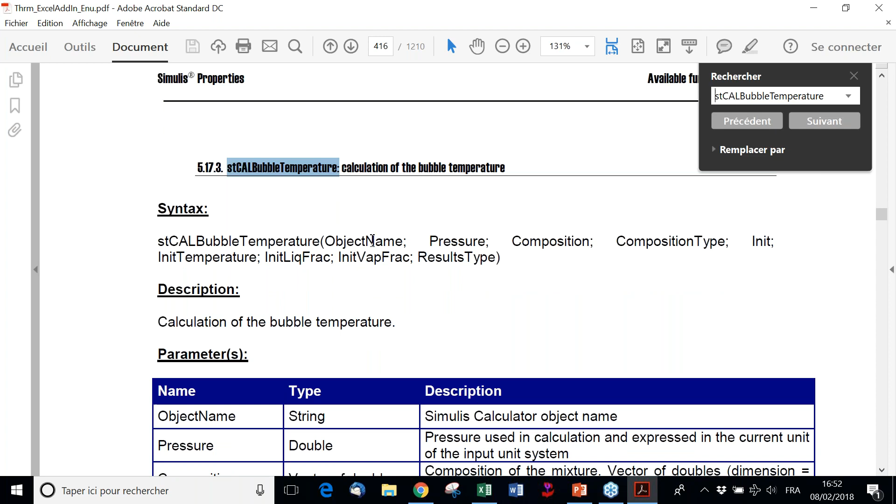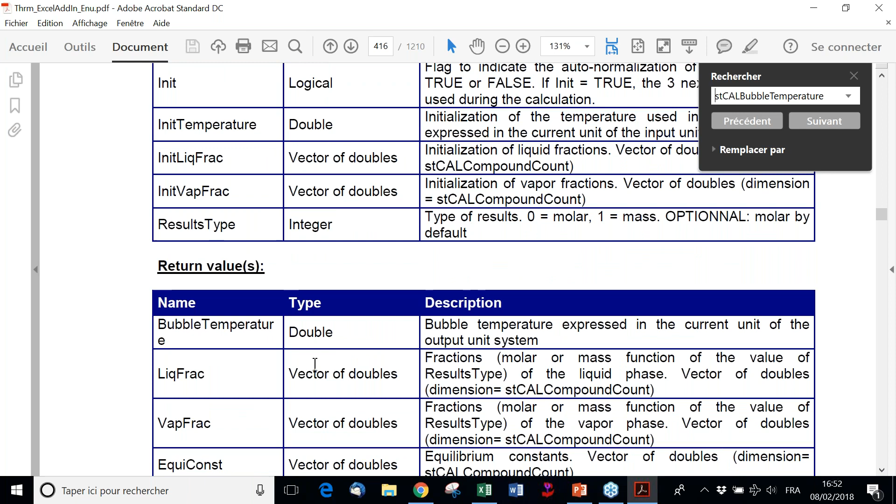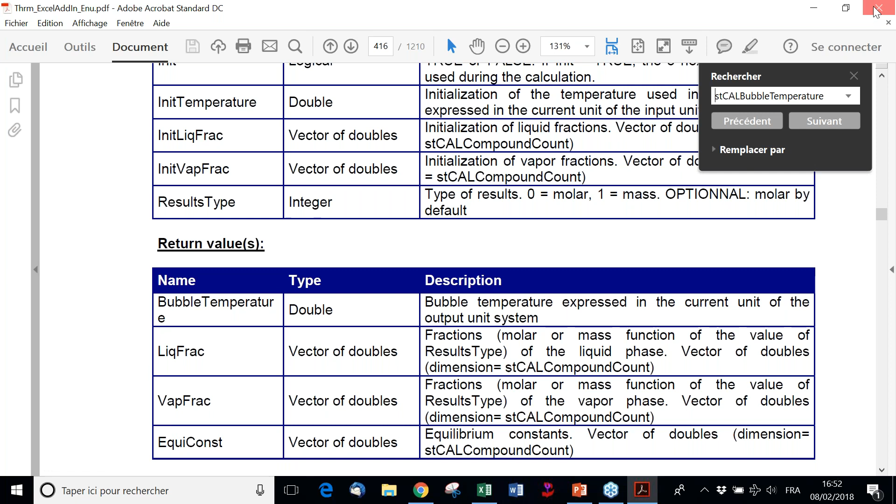When you use this function, in fact, if you go to the help, you can see that we explain what is the syntax for the function, what are the input parameters, the ones you provided before, and then what are the results. That means the first one is a real value for the bubble temperature. Then you have a vector for the liquid fractions, then a vector for the vapor fractions, and then a vector for the equilibrium constant. So we want to recover all these values. So this is X.

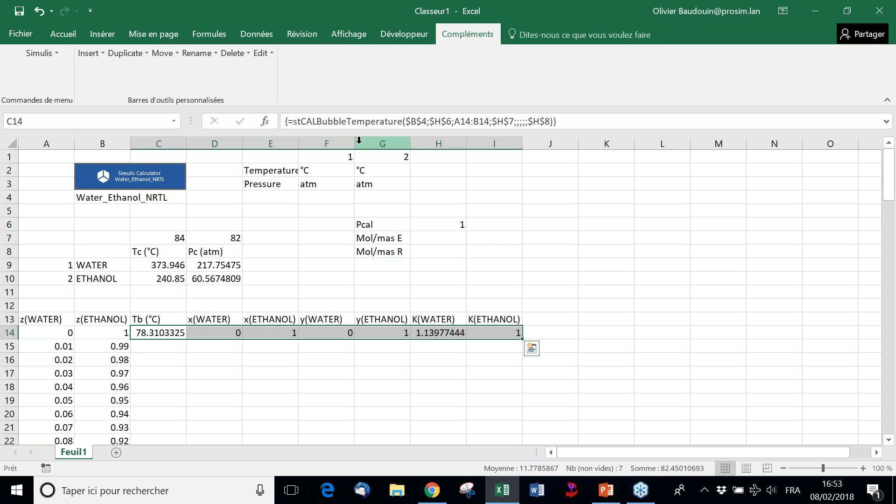And using Microsoft Excel, in order to recover several values from a function, you have to edit the function, select all the cells in which you want to have the results, and then press simultaneously Control plus Shift plus Enter. And then you can do the calculation.

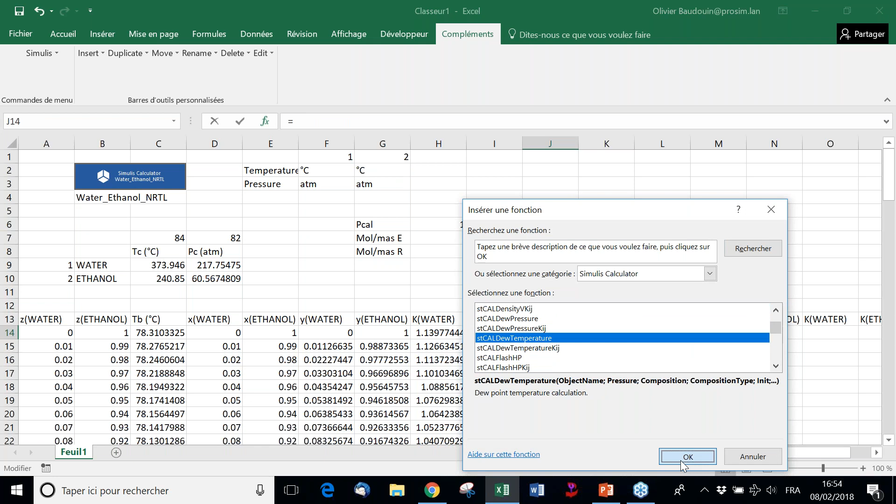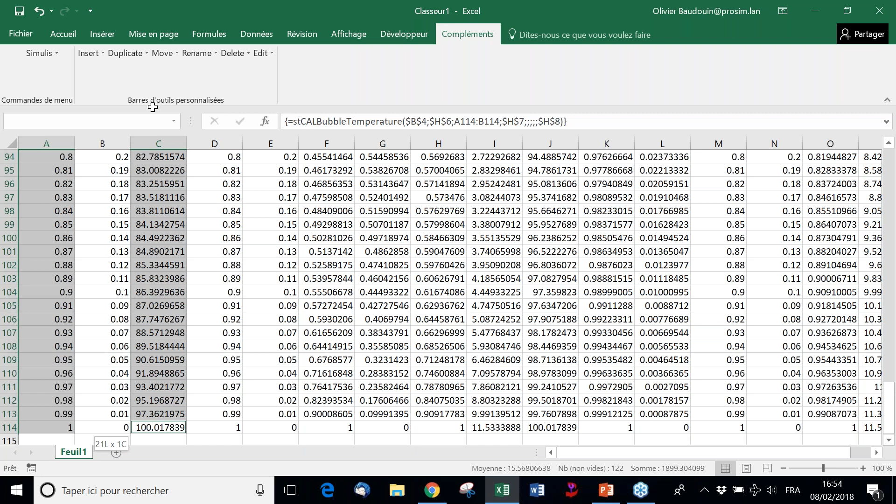We do the same for the dew temperature here. I will select the correct function. Which calculator I use, what is the pressure I want to use for the calculation, what is the composition, what is the composition type, and what is the result type. And then now I can plot the bubble temperature and the dew temperature.

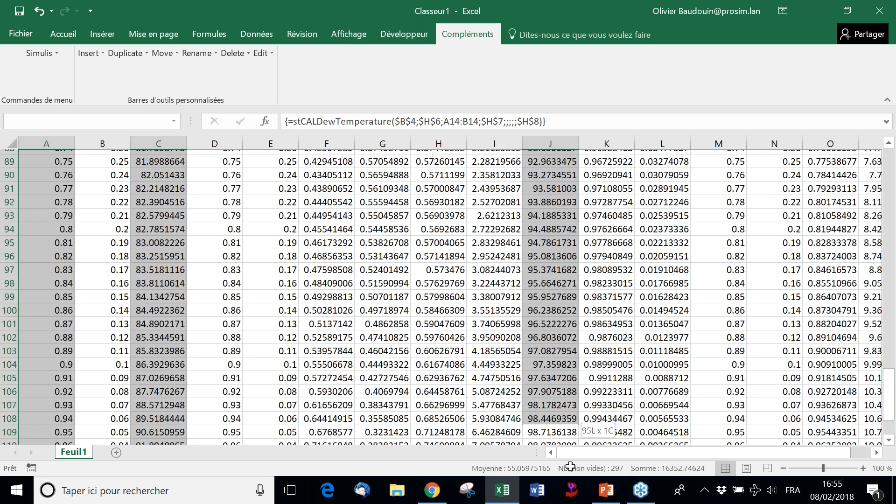Now, if you want to change, for example, the units for the output system, for example, you change temperature from degree Celsius to degree Rankine, automatically all the spreadsheet will be changed. That means the results for the bubble and dew calculation, but also the value for the critical temperature and so on.

And now if you, for example, build a nice spreadsheet which can be used for many different systems, then if you come back to the calculator and change the calculation system you are using, for example, in that case we will use methanol instead of ethanol. We will change, for example, the model also. In that case, we use a predictive model like UNIFAC modified Dortmund. When you use this kind of predictive model, you have to check if the parameters are available.

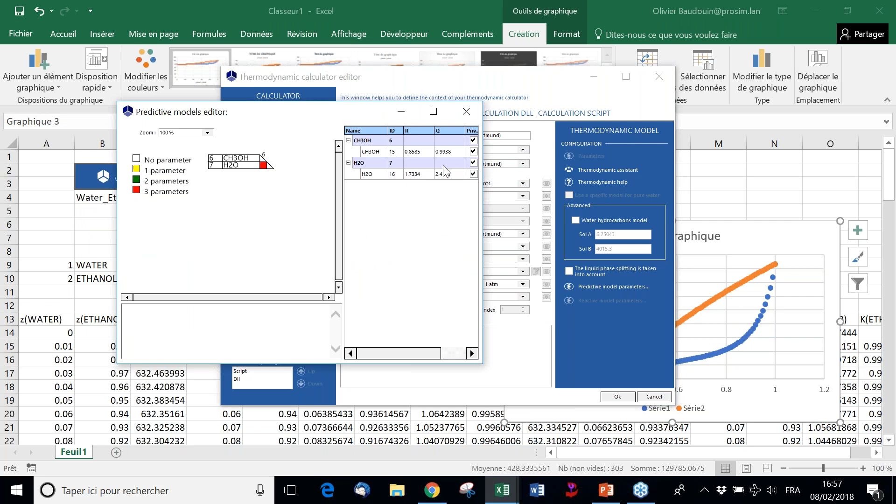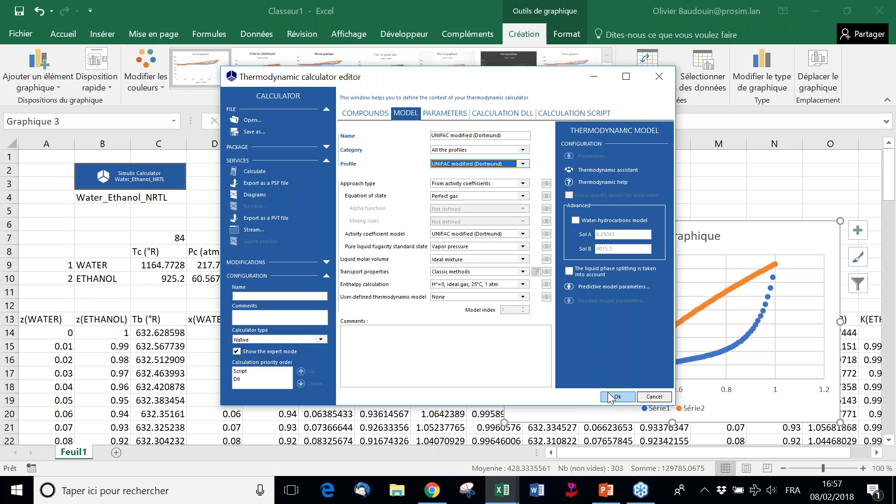So you have here a button, and in this button you can see the matrix which corresponds to the system you are using. Here you have the subgroup parameters for the van der Waals volume and area, and here you have the values for the group interaction parameters. Okay, and then I can come back to my spreadsheet, and in that case you can see water, methanol, and everything is changed everywhere.

So it was a very quick overview of Simulis Thermodynamics inside Excel. If you want more explanation or information, you can come back to us.